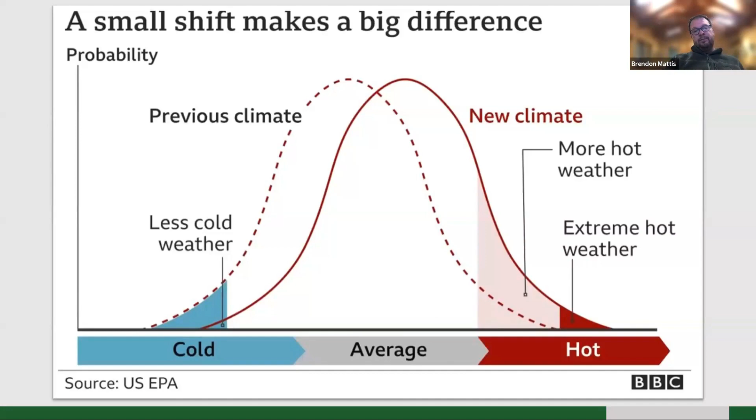Small shifts make a big difference. What we're seeing now is the global average temperature is slowly increasing, and it's creating a lot of strange events across the board. We're seeing more extreme hot weather. We're also seeing less cold weather. Ski seasons are getting shorter. Snowpack is decreasing, lower water levels in a lot of dams, that sort of thing. So these relatively small impacts can really throw the planet off. We see it every day.

New high temperatures broken. I think 2023 was one of the highest average temperatures that we've ever seen. So it's going up and up and up. And I think we're a little under 1.5 degrees C right now, but I think there is hope that we can maintain that. This month we're seeing record low levels in Lake Mead, regular fire seasons in the West, doomsday glaciers, the list goes on. I think this year we've actually had a pretty quiet hurricane season so far. What can we do as commissioning providers to help the climate? We'd like to explore that today. What's happening, and what are the efforts we as an organization can do and what we can do individually.

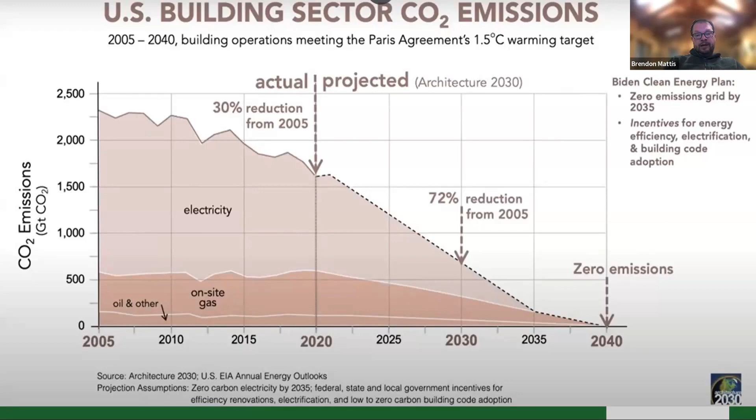I think we're seeing a similar thing across the U.S. We're adding millions of square feet, and we're seeing a reduction in CO2 emissions. So our efforts are making an impact. We just have a little bit farther to go. What's the probability of getting there? What are we doing right?

So what are we doing to get there? We're seeing all-electric new designs. A lot of our new buildings are all electric. We're seeing a lot of increased efficiencies. I think 10 years ago, we really weren't even talking about the EUI of buildings. Now we are. I think now all of us know the different sectors and what the EUIs of these buildings are. What's the target? Where should we be at? So just that thinking has come a long way.

The Inflation Reduction Act is certainly helping. We're incentivizing carbon-free electricity by providing some tax incentives to large corporations, kind of a carrot or a stick. Right now, we're using carrots. We have incentives versus carbon taxes and that sort of thing. So trying to invest in clean energy and clean energy infrastructure. The United States is providing about $400 billion in this over the next few years, trying by 2030 to really make that impact on reducing the CO2 output of our industries and our buildings.

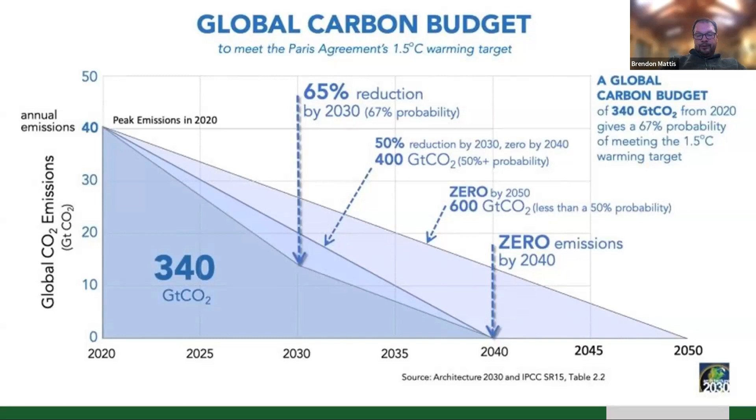They're investing in the production side and also the development side in industry as well: battery plants, electric cars, heat pumps in your houses, that sort of thing. We're seeing a large increase in the generation side from geothermal, wind, solar. There's even discussions now about smaller, more scalable nuclear as well. So I think all options are on the table, and we'll talk a little bit about what the differences are between each of those.

So where are we at today from a global average surface temperature? We've gone up significantly. I think this year was the hottest year on record, but we're a little bit over 1 degree. I think the last input of this is in 2020. So 3 years on, we continue to increase.

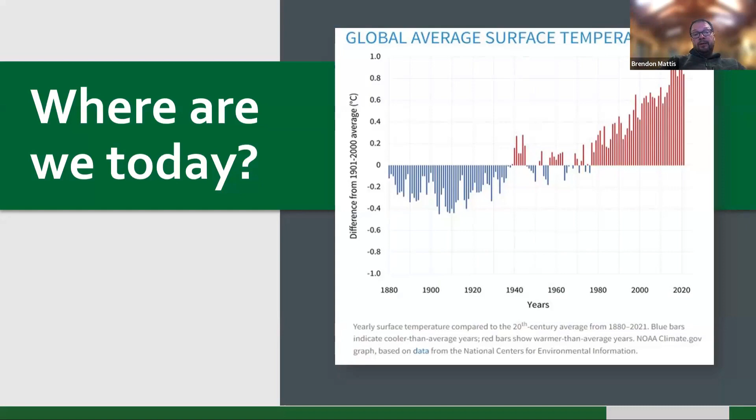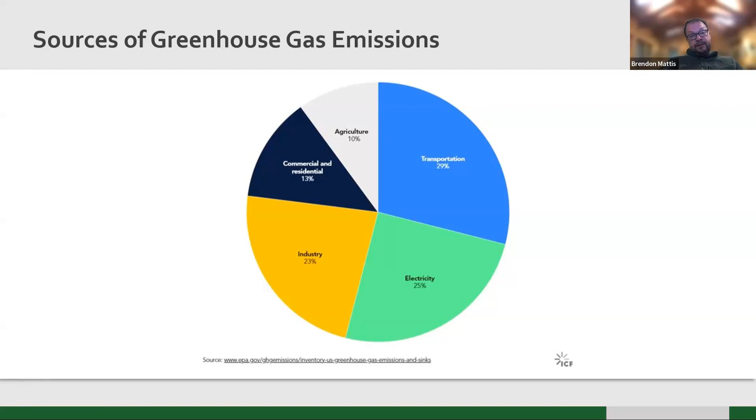What are the sources of the greenhouse gas emissions? The transportation sector is about 29%. The world we live in, the commercial and residential buildings, we're about 13% of those carbon emissions in the world. Industry and electricity make up about the other half of that. We really need to work on the electricity, the generation side of it, and we'll talk a bit about what's happening there.

U.S. wind generation. The U.S. Energy Information Administration, the EIA, in 2010 predicted that we would have a much lower amount of wind production than we really have now. We've probably doubled or more wind production than we thought we would have even 10 or 15 years ago. Wind generation has picked up significantly, providing that sustainable electricity to our grid.

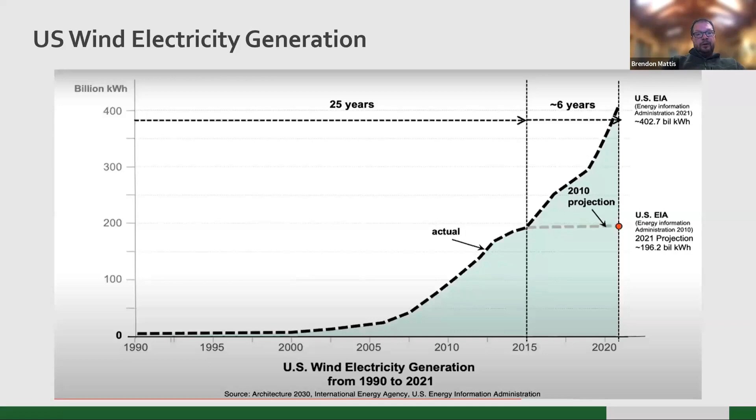Similarly, on the solar side, solar electricity, the EIA just 10 years ago wasn't super optimistic about how much energy we could produce with solar, but we've seen that again take off exponentially.

So we've gone from a prediction of not a whole lot to over 160 billion kilowatt hours of solar electricity. And I think if you drive around the country, you drive around different places, you see more and more of the wind generation, the wind turbines. You see a lot more solar installations. So it's happening.

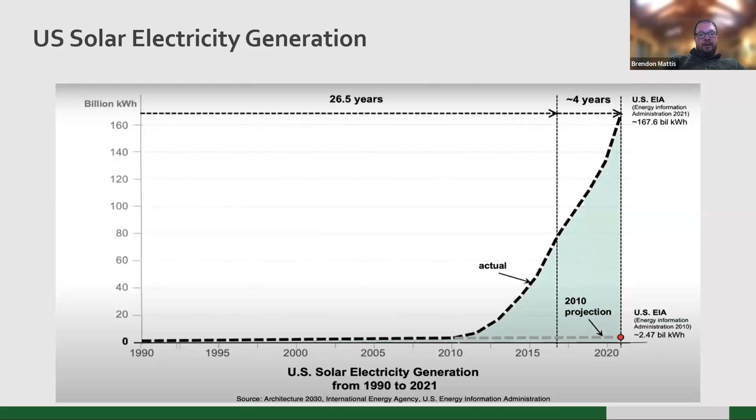Why is it happening? What's driving this increased production? It's really the cost. The cost of solar has gone down by about 90% in the last 10 years. The cost of batteries has significantly reduced, by about 90% as well. Wind has taken a significant reduction. We're about 3 times less cost on the wind side. So this cost structure really changes the whole game.

What we didn't think was achievable is now within our grasp. And we'll talk a little bit about how much energy we need to produce. But I heard a comment the other day, someone said that money talks, but politics shouts. And I think what they mean by that is the political energy is really into doing this now. I think people believe that, hey, it's affordable. It's less costly than installing new coal plants or gas turbines, that sort of thing. So it's more deployable. It's starting to happen. It's within our grasp.

And we're seeing real investments in this, creating new clean jobs, clean energy production, infrastructure projects. So there is a lot of that going on right now. I think maybe the holdup on some of these things is just getting the permits to do what they want to do to get these installations connected to the grid.

In the last year or so, nearly 28 gigawatts of new U.S. generating capacity was added in 2021. This slide is a couple of years old, and it's been led by wind and solar. So that's what's really leading the market right now from a new capacity standpoint: wind and solar.

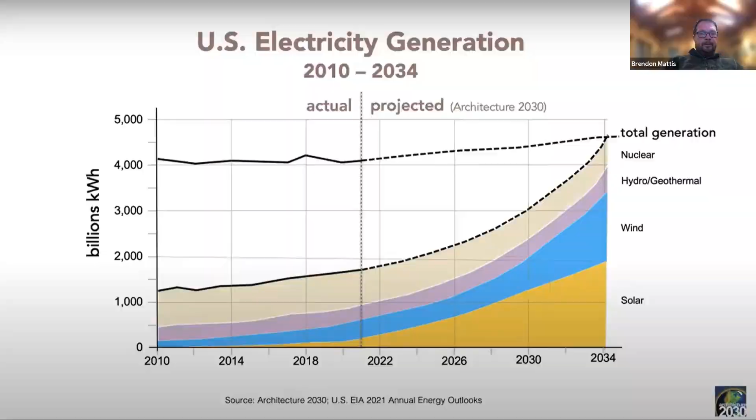So what does this mean for commissioning? Electrifying these buildings: over 40% of building CO2 emissions are from buildings that are over 50,000 gross square feet. And that's less than 2% of the entire building stock. Those are large hospitals, data centers, laboratories, our university buildings; a lot of those are over 50,000 square feet. And most of the building CO2 emissions come from those buildings.

So there are some real incentives now to zero in on the larger buildings to start to decarbonize or electrify those as well. And we're seeing more and more programs. There are goals from a corporate level. There are goals from a state level to really push into these buildings and identify which ones are the big users and which ones we need to address.

Yeah. All right. Some technical difficulties. All right. Can you guys still see me? Apologize for the interruption. Sure. All right. Yes, see that screen. Move on to the next slide. So yeah, decarbonization goals. All right, we're good.

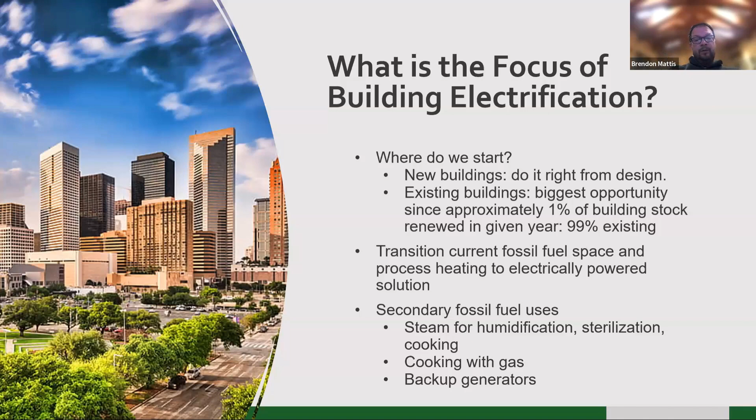What are the steps to reduce CO2 through electrification? The first is efficiency. If we can reduce that load, that's where we want to start. So we want to start with insulation, maybe some window shading, putting new windows in. Envelope improvements are very important for reducing all energy use.

You compare a building built 30 years ago to a new building today, just how tight the envelope is, and that leakage reduction makes a huge impact on your energy use. So those drafty buildings have an impact from an energy use standpoint.

Ventilation is another place. Going through COVID, we've seen a lot of things happen, from decreasing ventilation, maybe for demand control ventilation. Now ASHRAE is looking to push that up from a ventilation standpoint. I think optimizing that, we have much better monitoring now. We have PM10, PM2.5 sensors we can put in buildings. We can not only watch the CO2, we can watch the particulate, what's happening in these spaces. So now we can start to really track our ventilation with what's going on in the building.

Heat recovery, we see that a lot of times with exhaust air, recovering that heat, heat pumps, efficient distribution, energy management. And lighting is always a big deal. If we can reduce lighting loads, now we're reducing cooling loads; heat and cold storage. So all of these things from a design perspective have big impacts on how buildings use energy.

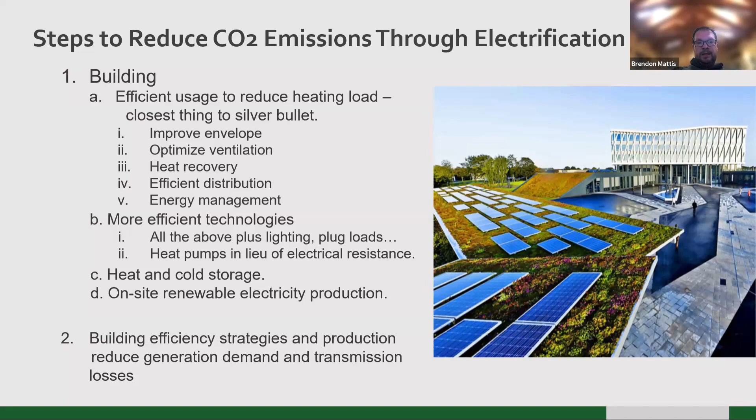And from a commissioning standpoint, if we can help optimize those sequences in the design, review those, and help the designers write better sequences, that is probably the best time spent from an overall building performance standpoint.

So what steps should we take? First is improve building efficiency. If we can reduce that EUI by looking at runtime hours, heat recovery, maybe some simple fixes. Low cost fixes might include heat recovery, that sort of thing. I got a note up here.

Shift in electrical generation. We also have to work on the production side of it as well: move away from coal and gas and move more towards the low carbon sources, PV, wind, solar, hydro. That's not always the best answer. And we'll talk about what's going on on the grid side. As we electrify buildings, we have to be conscious of what's happening at the grid as well and consider that mix of what we have.

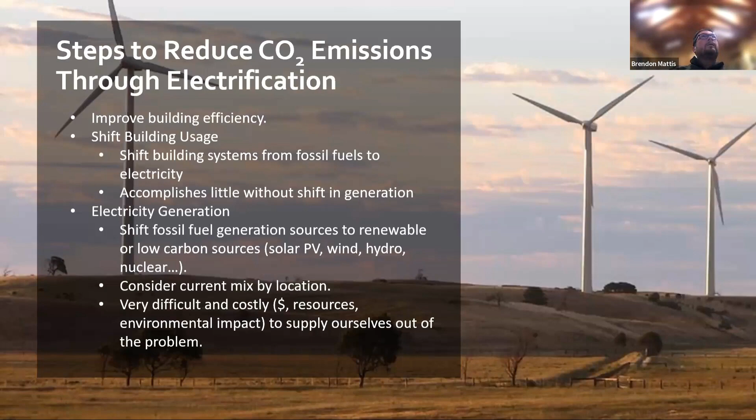The time horizons for electrical generation. As we get further out in time, we'll see more and more use of those renewables. In the short term, right now we're using all the low carbon sources that we can. We want to have more and more penetration of those low carbon sources and continue to peak with the natural gas, the coal, as we increase the sustainable resources and decrease the overall.

In the middle term, we want to base load with the low CO2 and then peak with those higher sources less frequently. In the long term, base load all with low CO2 generation and peak with storage. So batteries become a big deal as we move into the future.

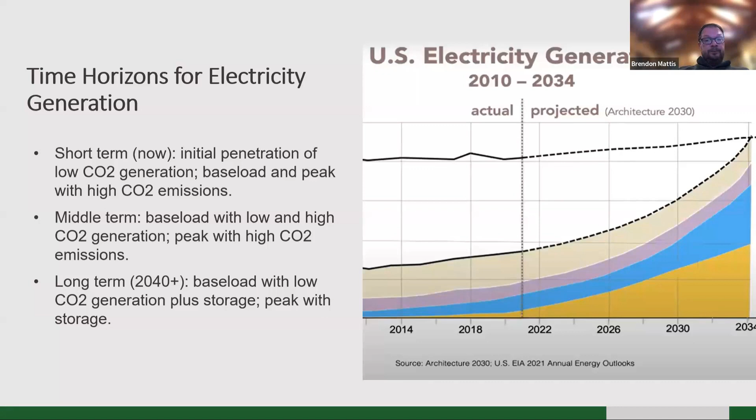So on the generation side, fuel input matters. It was something that kind of took us by surprise on some of the projects we did with the GSA. If you look at it from a source standpoint, gas or coal, you have 3 units of input to make 1 kilowatt output, and that's where you get a lot of the CO2 emissions. Gas turbines are similar, you've got 4 units of gas input and 1 unit of output. The good part of gas turbines, and you see a lot of that with peaking plants, is they have a quick response and their emissions are relatively low compared to coal or gas.

Nuclear is something that we're looking at going into the future as a country. But the question there is you still have the production of the fuel, and then what do you do with that waste at the end of it? That's probably the biggest question on the nuclear side. Whereas wind, solar, PV have low fuel inputs, it's all sustainable, natural, environmental, and you get electricity out the other end.

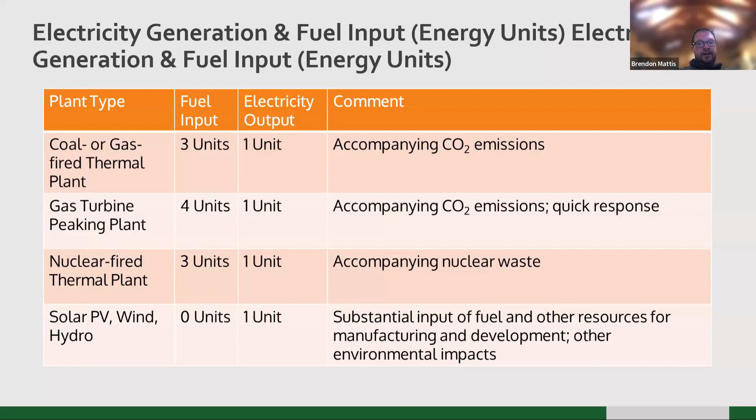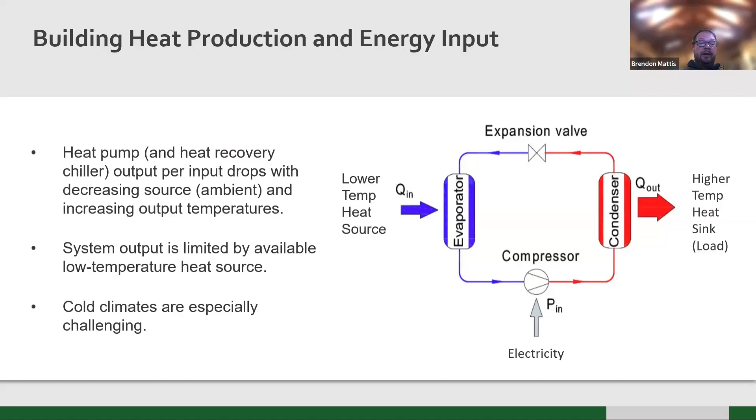From a building heat production standpoint, now we're using this power we've created on the grid. How do we move that into the building? Heat pumps are a great way to go, or heat recovery chillers maybe less so, but heat pumps, if we have decent ambient temperatures or a consistent source of heat, are great. Some of the limitations of heat pumps are what do we do at low temperatures, when it's cold outside? We need to get a little bit creative around that, and we'll talk a bit about that in a second.

Building heat production and energy input. So, inputs versus outputs, not the EUI, but the coefficient of performance. A gas boiler, you're going to have 1.1 units in of natural gas to get one out, and along with that comes the site CO2 emissions. Electric resistance heat sounds like a great idea, but when you think back to that source energy, where are you getting your power from? Burning straight kilowatts to make heat probably isn't the best use. Now you've got 4x on the other side of what you provided.

Heat pumps become more and more effective. Your coefficient of performance is somewhere between 2 and 4 units of output when you have decent ambient temperatures. In colder climates, you see more and more ground source heat pumps. If you have a stable ground temperature, looking at your aquifers, what's happening underground, how much energy can you reject to that space. Again, you get high efficiencies on ground source heat pumps: for every unit in, you get 3 to 4 units out.

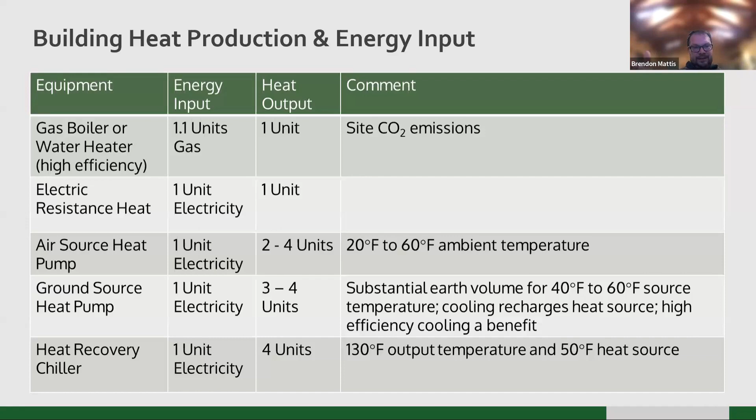Not all electricity is created equal. Something else I became aware of after doing a few projects is looking at the CO2 equivalent of each of the regional emission factors. You look at upstate New York, they have a lot of hydropower up there, so they've got a lower CO2 output per unit of electricity. You get to the Midwest or the Southeast, where there's a lot of coal that provides a lot of their energy. Now you're looking at 150 to 200 kilograms of CO2 per MMBTU.

The Northwest, which is a large area, there's a mix of hydro and natural gas and coal out there as well. We've got a little bit lower of a number there. You get into Seattle, we've got a very low number, because hydro is primarily the source of power for us. So it's a very low CO2 impact.

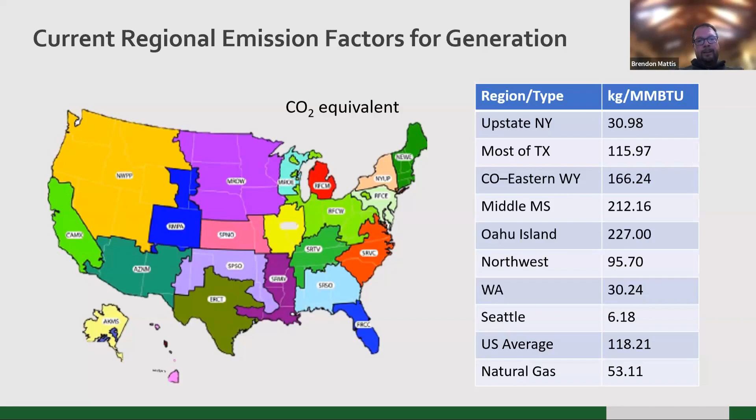And natural gas often is a pretty clean source. If you're using it for heating in a building, now you're using that heat directly. You've got a condensing boiler. You have less impact. If you're using electricity for heating that's produced by a coal generating power plant, that might not be the best thing. As a temporary measure or as a phase or a step in your process, looking at natural gas might be an okay reduction in CO2 emissions for your building.

Speaking of the emissions factor, as we put all of this calculus together between the production side and what's happening on the use side inside of the buildings, natural gas emissions are at 53 kilograms per unit of heat output. When you look at all the different options, if you're going to go to the average United States, let's use electric resistance heat to heat your building. That could be an electric boiler, that could be strip heaters, that sort of thing. You have a 2 times impact on the emissions side.

So not only are you using this electric heat to heat your building, but now you have to think about those emission factors, and it's probably way worse than natural gas. You get into a low emissions area, electric resistance heating can be half of what natural gas might be. In a high emissions area, you get to Oahu, electric resistance heat has a really big CO2 impact to your environment. So probably not the best use of electrical power.

Air source heat pumps. So now we have a COP of somewhere between 2 and 4. And you've got the emissions factor of 118. So it's maybe about half or break even to natural gas emissions. You get to the lower emissions, now it's a quarter to an eighth. You get into high emissions, even with the air source heat pump, you might be better off to go with natural gas. It will have a lower CO2 output than an air source heat pump if you have a high emissions area.

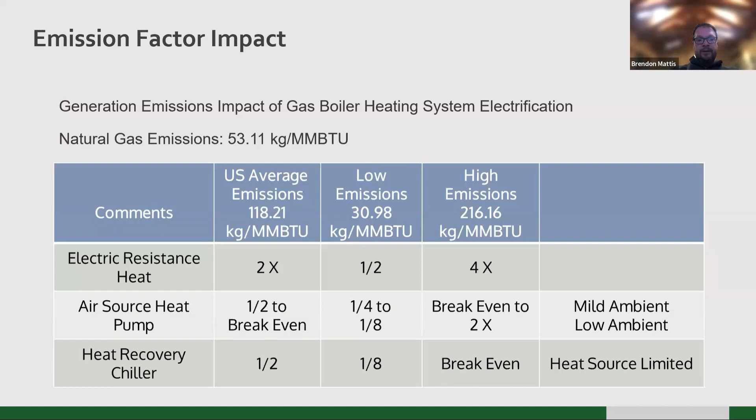So the electrical grids are all connected to some degree. What we see is the renewables are used first. We're going to use as much wind, we're going to use as much solar as we can. So it's kind of a zero-sum game. I mean, we're using as much as we can produce. That impacts the peaking plants, those natural gas plants, the coal plants. They have to react to how much renewables are being put on the grid.

In the short term, marginal increases in the overall electrical load are met with those high CO2 sources. So we might baseline with as many renewables as we can, but we're still going to use the high or medium CO2 emitting sources as we go forward. If we can start installing low emissions on-site systems, solar, wind, that sort of thing, that would be ideal. But efficiency becomes kind of the key for what we want to do here.

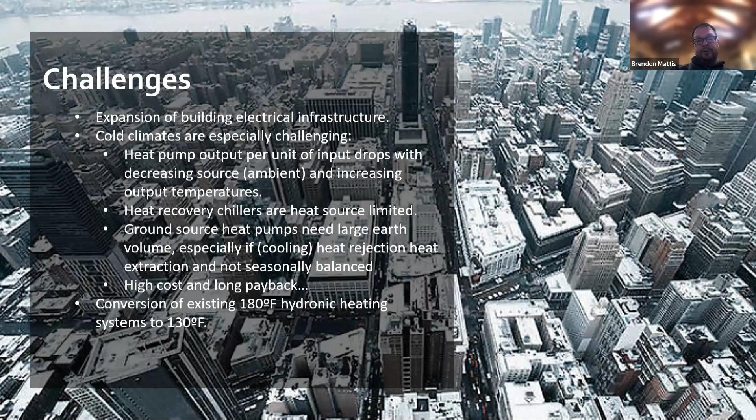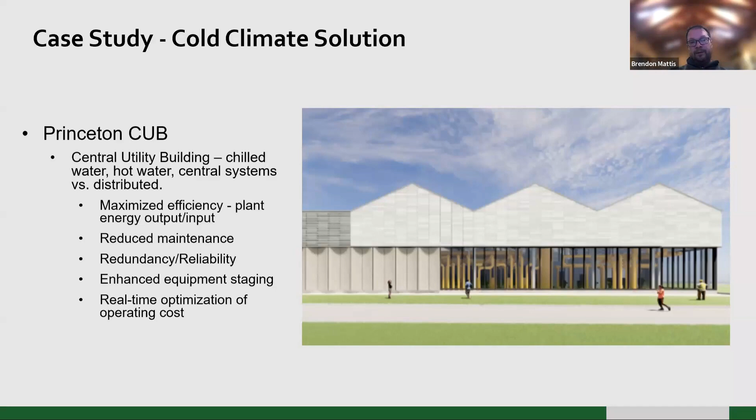Case study in cold climates, the Princeton Central Utility Building. This is a building where they basically built a new central plant to serve a new campus they're building, and a very creative use of ground wells, cooling towers, and thermal storage. They also wanted to centralize it. We're seeing more and more of that now. Centralizing this equipment has a big impact to operations. We see a lot of universities have chillers in every building because they've got some special experiment going on. But if we can centralize that equipment, we're better off from an efficiency standpoint, reduce maintenance, maintainability, redundancy, staging gets a lot better, and the reliability of less equipment to deal with.

This is a one line of their central plant. So they have a series of geothermal wells that are out in the system. They circulate water through there, and they pick that water up and send it to heat recovery chillers. And that produces both heating and cooling, depending on what the demand is. They also put thermal storage tanks in for low load conditions, so if we can keep that equipment off for as long as possible, rely on those tanks. That will help the redundancy of the equipment.

And when you get to peak loads, they also have some condensing boilers to deal with that peak when the ground loop isn't able to provide everything, and cooling towers on the other side as well. They started out with a smaller system, and as they grow that campus, they'll add more and more equipment to that. That job's just getting commissioned right now, actually this week.

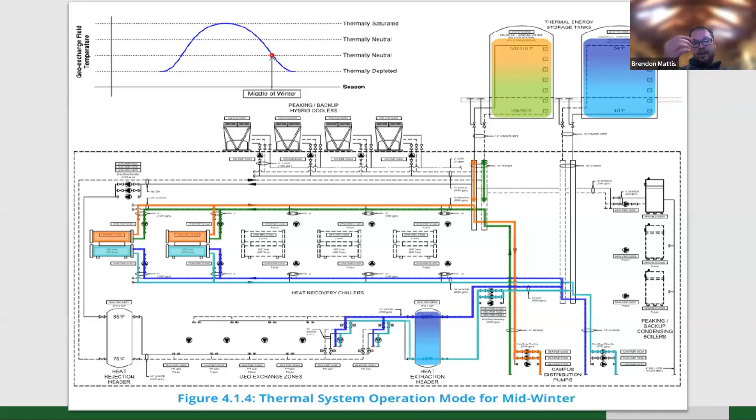Commissioning recommendations. So what can we do from a commissioning standpoint? We need to improve our building efficiency, so we can have a very direct impact for improving building efficiency. We're seeing a lot of monitoring-based commissioning happening out there. I think from an existing building, a retro commissioning standpoint, I wouldn't commission a building without analytics. It just gives you so much better of a view of what's happening in those spaces. And you can go back, look at two, three weeks ago, what happened when the outside temperature was this, and you can see how equipment stages. Did it stage correctly? It gives you a much better window into everything that's happening.

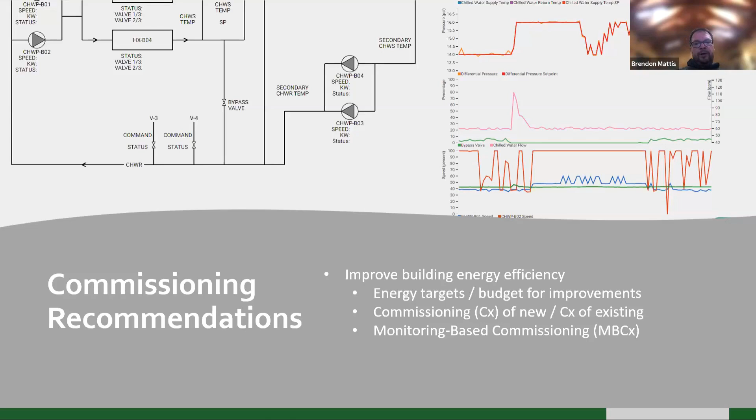Commissioning recommendations: don't let perfection be the enemy of progress. I think we see this over and over, kind of an ideal of what we want to do with the building, but that may not align with what the owner wants to do. We've looked at a few buildings where maybe we're not able to do the whole thing the way we want to do it today, but if we can address lowering those heating water temperatures, maybe we go from a 180-degree water system to a 130-degree water system. That might mean more pumps, more pipe, changing out some coils. But that's maybe a great first step, and keep the gas boilers there, and deal with the chillers later. But just start somewhere to do every little bit that you can that meets the owner's budgets.

And evaluate technologies as they go forward. Right now we're seeing new CO2 technologies in heat pumps that maybe can create 180-degree water. Kind of new technology, somewhat untested, but I think there's a lot of great development happening there. And at the end of the day, I think if we can utilize resistance heating sparingly, we're going to be CO2 ahead for the long run.

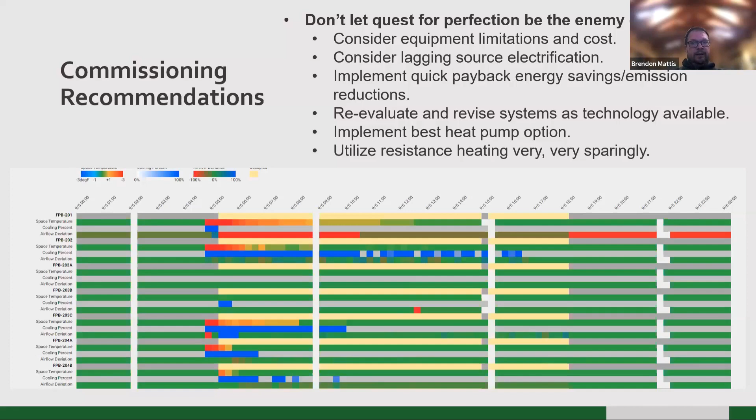Complex building systems. We see now more and more energy efficient buildings are happening. We see complex building systems.

We've got to be really careful with those. If we have the operators spending more time trying to keep these buildings running, then all of our energy efficiency is kind of out the window. So we've got to maintain a balance of simplicity.

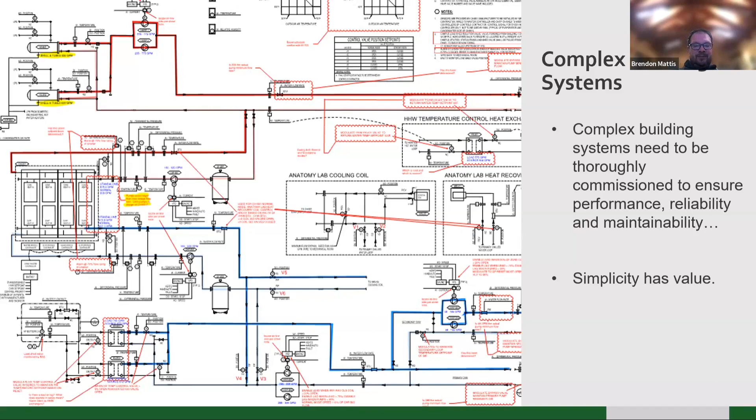And operators, they might run 20, 30 different buildings, and to come into your building and try to figure out what the heck's going on when something fails can be mind-boggling, and they just don't have the training and the expertise to deal with some of these systems. They're overly complicated. So simplicity has value. Please work with your engineers to make it simple so the operators can deal with it 10, 20, 30 years down the road.

A couple of examples. We'll hit the highlights, running close on time here. Federal office building. So some lessons learned there. A phased approach. So, do what you can with the budget that you have now. Look at lowering those water temperatures, optimizing sequence of operations, heat recovery, do that first, and then we'll go on to the next part later.

By switching from steam to locally sourced boilers, we're reducing the CO2 impact by 25%. As we add heat pumps or a hybrid system on top of that, it lowers that CO2 even more. The cost begins to go up. We looked at an all electric option, scraping off the existing plant, putting a new one in. From an energy saving standpoint, the payback was about 250 years, and a hybrid heat pump system was about a 20-year payback, and had significant CO2 reduction impacts as well.

Seattle libraries. So there we had 25 buildings under 40,000 square feet, all sorts of building or system types in these buildings. What we looked at doing there from an electrification standpoint is we created a 10-year plan. Number one thing is putting in energy recovery on air handling units. So how do we collect that heat? And then, reducing those loads with heat pumps. So heat pumps and energy recovery, those Daikin units do a great job of that. Kind of a premium cost, but have payback over the long run.